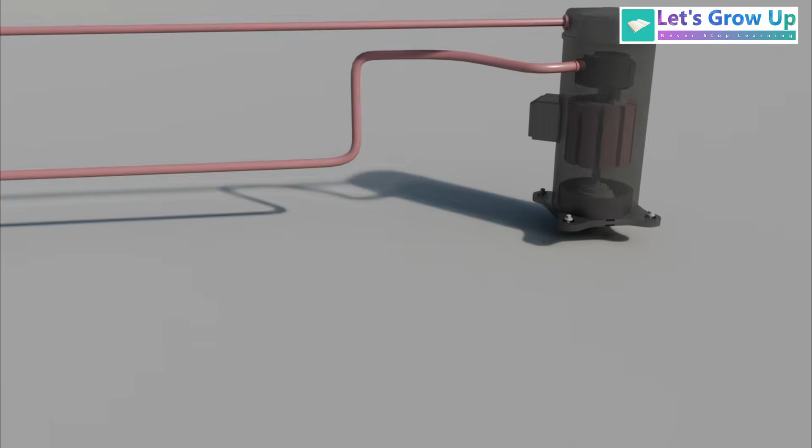What happens if we remove this small component? If you removed it, your compressor would likely suffer a quick and violent death.

Inside the accumulator is a U or J-shaped tube.

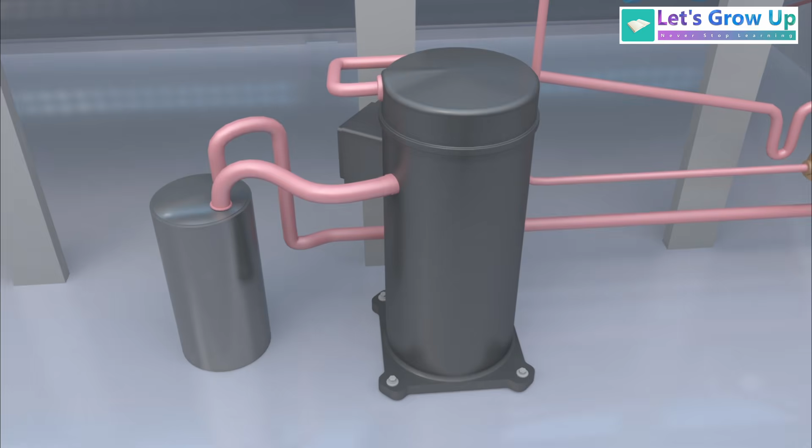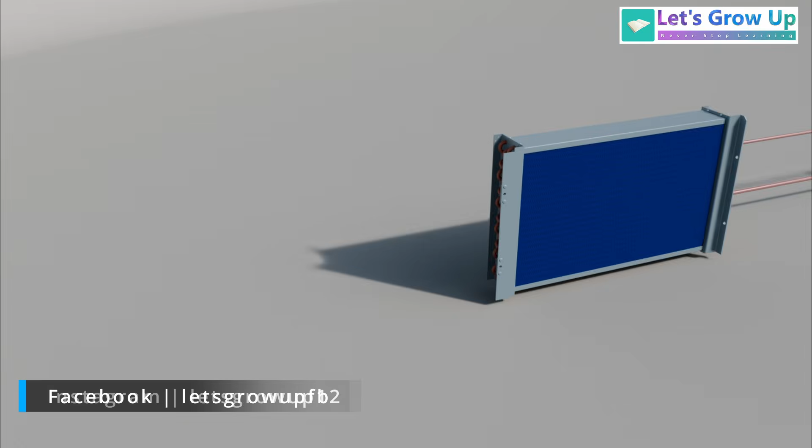An accumulator is a vital safety component in automotive or HVAC systems because the compressor is the most expensive part of the system. The accumulator is strategically placed between the evaporator and the compressor to act as a bodyguard.

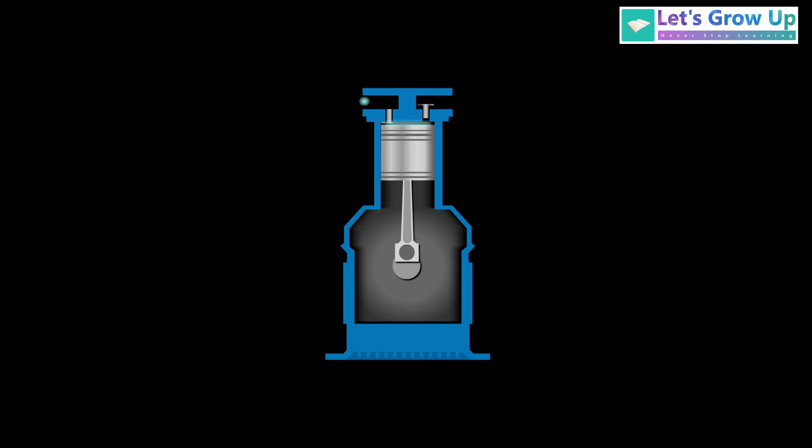What happens if we remove this small component? If you removed it, your compressor would likely suffer a quick and violent death. You see, compressors are designed to handle gaseous refrigerant only.

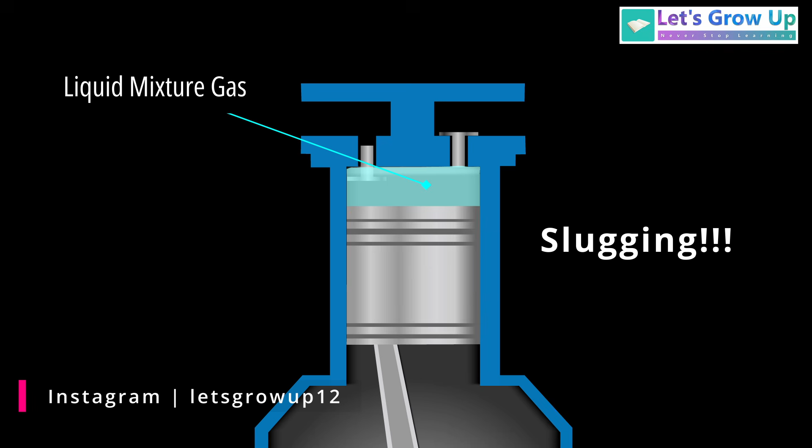If liquid enters the compressor, it causes a mechanical failure known as slugging. Because liquids are incompressible, the internal pistons or valves will shatter when they try to squeeze a liquid that won't give way. But wait, how does liquid get inside the tubes in the first place?

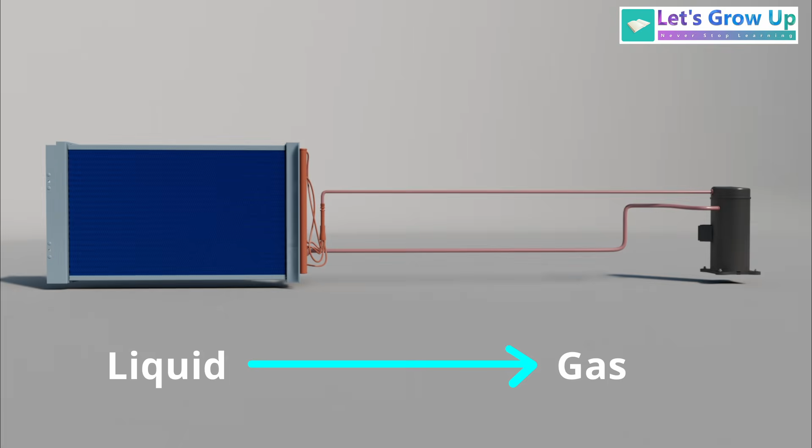In reality, the entire system relies on the refrigerant constantly flipping between a liquid and a gas. If it stayed as a gas the whole time, it wouldn't be able to move heat effectively.

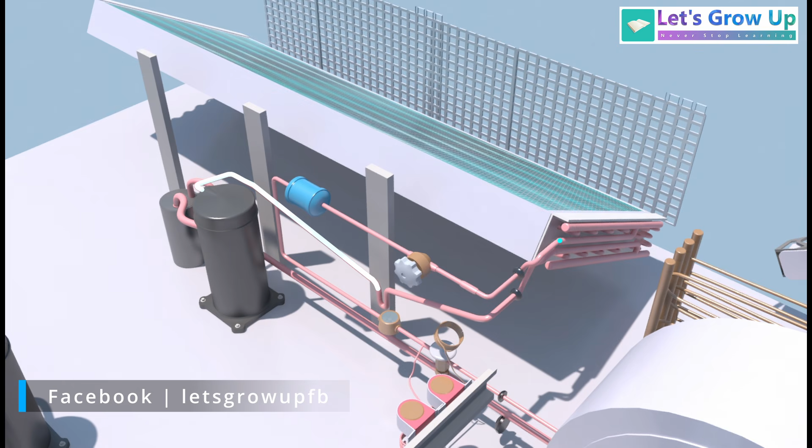The journey begins at the compressor, which pushes out high-pressure gas. This gas travels to the condenser, where it releases heat and turns into a high-pressure liquid. That liquid travels through the liquid line

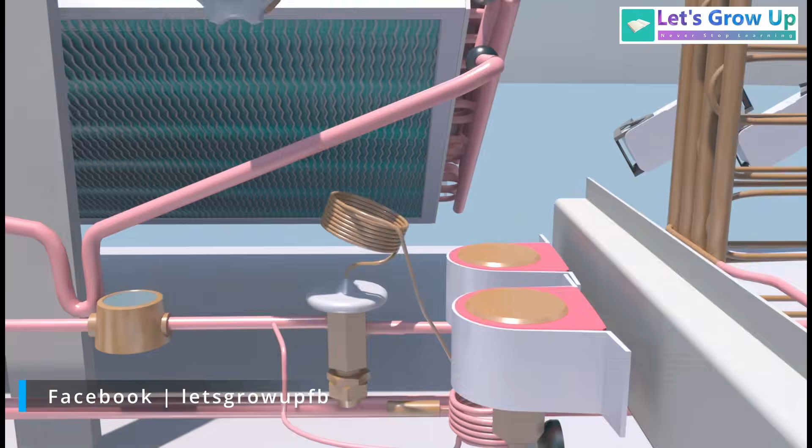toward the expansion device. It drops the pressure suddenly, creating a cold, low-pressure mist of liquid and vapor. This mist enters the evaporator coils. As warm air blows over these cold coils, the refrigerant absorbs heat and boils back into a gas.

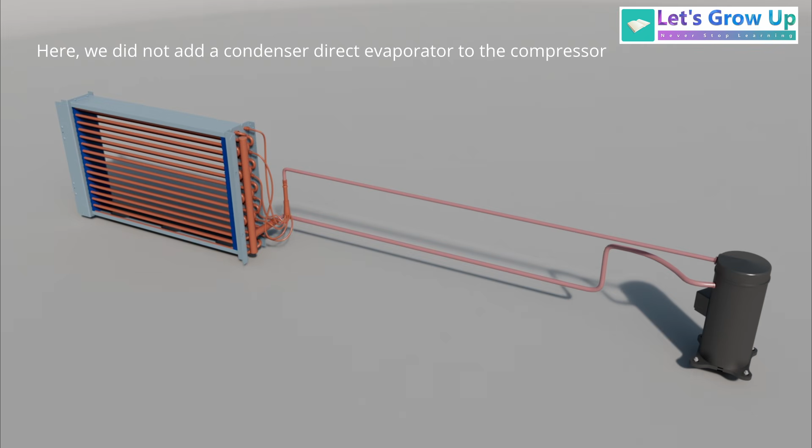Sometimes, the refrigerant doesn't boil completely. This wet gas is what heads toward the compressor. This is where the accumulator steps in.

Inside the accumulator is a U or J-shaped tube. When the mixture enters the canister, the heavy liquid drops to the bottom, while the light gas rises to the top. The compressor pulls from the top of the U-tube, drawing only the pure vapor that naturally rises to the top of the canister.

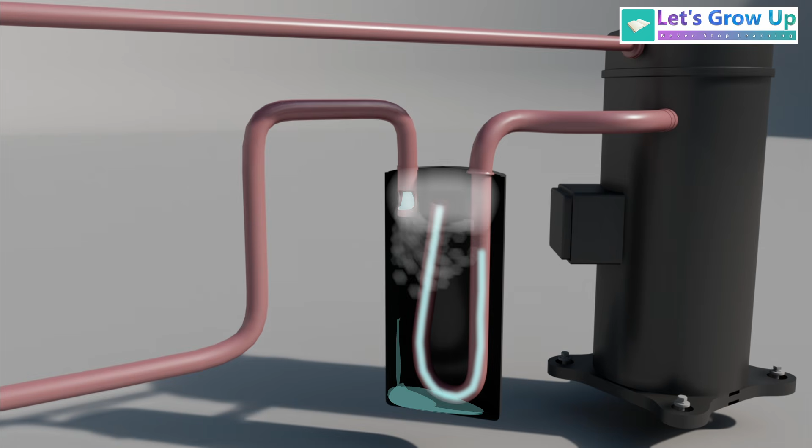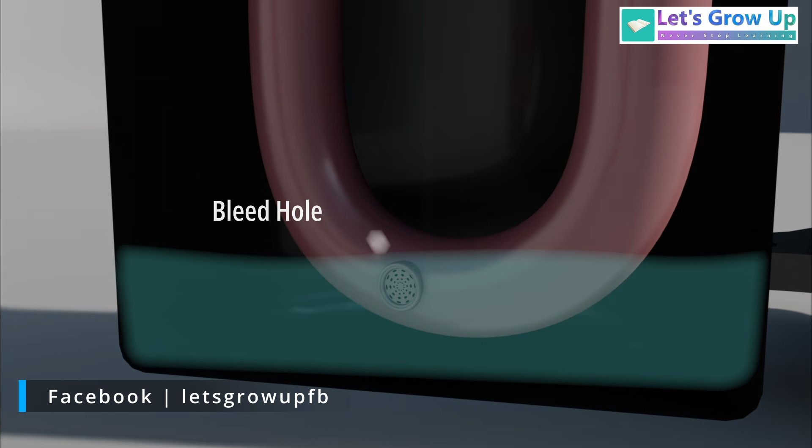At the very bottom of the internal U-shaped tube, there is a tiny hole, often called a bleed hole. As the compressor pulls high-velocity vapor through the U-tube, it creates a small vacuum. This suction draws a small, controlled amount of the liquid refrigerant and oil through the hole and into the vapor stream. Once inside the tube, this mixture joins the main vapor stream to safely return to the compressor.